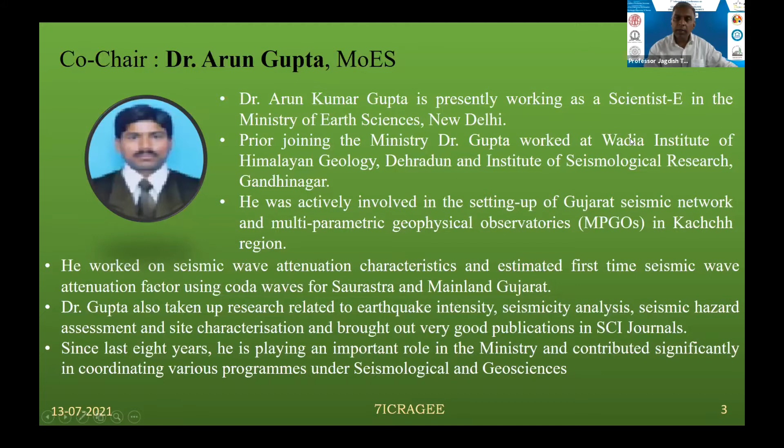Professor Sahu, your mic is muted. Thank you, Professor Ravi Jakka. Without further losing any time, I request my co-chair, Dr. Arun Gupta, to introduce the first speaker, S.K. Nath, Professor S.K. Nath from IIT Kharagpur. We will have another speaker after the first presentation then.

Okay, please go ahead. Thank you, sir. So Professor Nath is a very well-known geophysicist and seismologist of India, and he doesn't need any introduction. So as customary, I will read something, whatever is there.

Professor Nath was born in 1960, and he is a geophysicist, seismologist, and a senior professor at IIT Kharagpur. He is known for his geomorphological studies and is an elected fellow of the Indian National Academy of Engineering, Indian Geophysical Union, National Academy of Sciences India, and West Bengal Academy of Science and Technology.

He has amply been successful in making an excellent blend of exploration and solid earth geophysics and earthquake hazard science and engineering, with ranking contributions in near surface imaging, source, path, site, and ground response characterization, landslide and liquefaction susceptibility zoning, seismic hazard, vulnerability, and risk microzonation, so vitally needed for our globe.

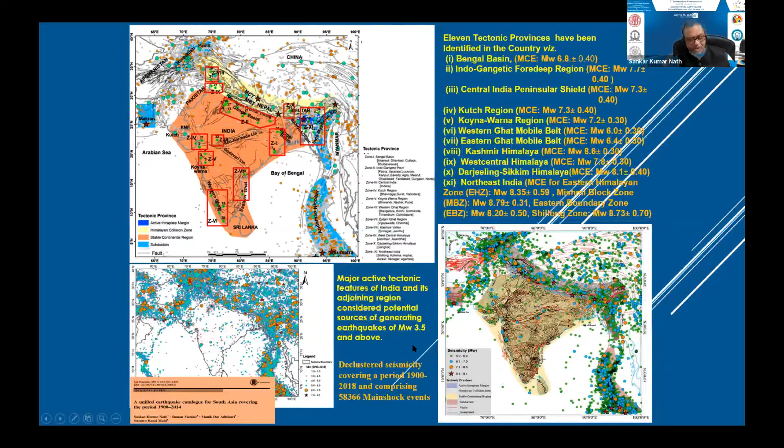So with this situation, we have divided the entire India into 11 tectonic provinces, the seismogenic provinces considered in this study. If you look at this diagram, we have a hugely clustered network of active neotectonic faults and the declustered earthquake catalog of 1900 to 2018, comprising about 58,366 main shock events. For this kind of study, you need the database, seismotectonic model, logic tree framework, and an output.

This needs an earthquake. The seismotectonic model needs an earthquake catalog, tectonic faults and lineaments, the seismicity, and the ground motion prediction equations.

In the seismotectonic model, the first and foremost thing is the layered seismogenic sources. There are many schools of thought which consider the layered seismogenic source as the only source, and a second school of thought which uses tectonic sources as the only source. For our ensemble approach, which is the focus of this presentation, we considered both the layered polygonal seismogenic sources at four seismogenic hypocentral depth levels, and also the tectonic sources.

In seismicity, we used the declustered earthquake catalog I discussed, which gives the recurrence rate, maximum earthquake prognosis, and polygonal and tectonic seismic activity rates, along with a host of ground motion prediction equations, including next generation attenuation models we developed as part of this study, within a logic tree framework where the layered polygonal sources are given 40% weightage and tectonic sources 60% weightage.

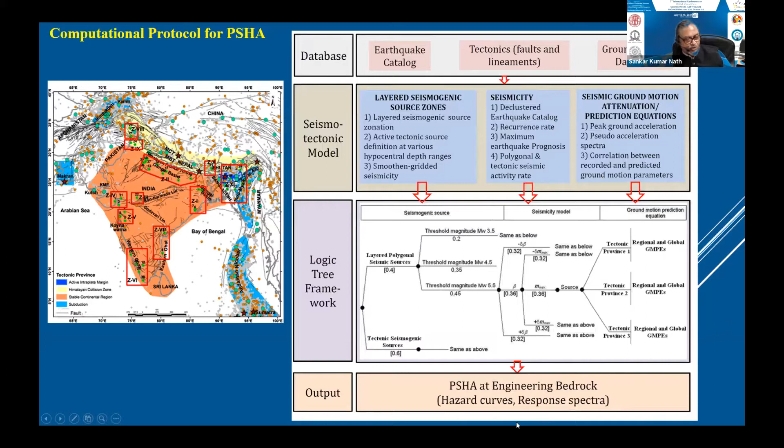Then we have threshold magnitudes of 3.5, 4.5, and 5.5 for this earthquake catalog. Each has a basically complete magnitude, and then we go into the seismicity model with plus minus 0.32 of delta max, across all three. Then come the sources as defined, the tectonic provinces, and the ground motion prediction equations taken into consideration, with the final output being the PSHA at the engineering bedrock.

We divided the entire Indian peninsula into 172 polygonal seismogenic sources at four hypocenter depth ranges: 0 to 25, 25 to 70, 70 to 180, and 180 to 300 kilometers, which are called deep-seated zones. The focal mechanisms were evaluated by summing up all the moment tensors extracted from centroid moment tensor analysis, embedded at these four different seismogenic depth levels.

With this, I'll give a glimpse of the seismicity parameters used, based on a Gutenberg-Richter relationship, modified using a Gutenberg-Richter tapered seismicity model, wherein lambda m is the cumulative number of events with magnitude greater than m, and b value is the slope parameter used in the computation, expressed as an exponential.

I've shown some seismicity analysis. I'm not elaborating on all of them since there isn't enough time, just giving a glimpse of some seismicity analysis and some of the seismogenic provinces.

Zone 12 has an A value of 3.45, B value of 0.72, with M max observed as 7.6 and M max calculated as 8.6. For zone 21, the A value, B value, maximum observed and maximum predicted are shown. Zone 72 plus 73 combined give an A value and B value, required for calculating the activity rate, along with the maximum earthquake observed and predicted, which is 7.2. This is for zone 63, this is for zone 28 plus 30, and this is for zone 25.

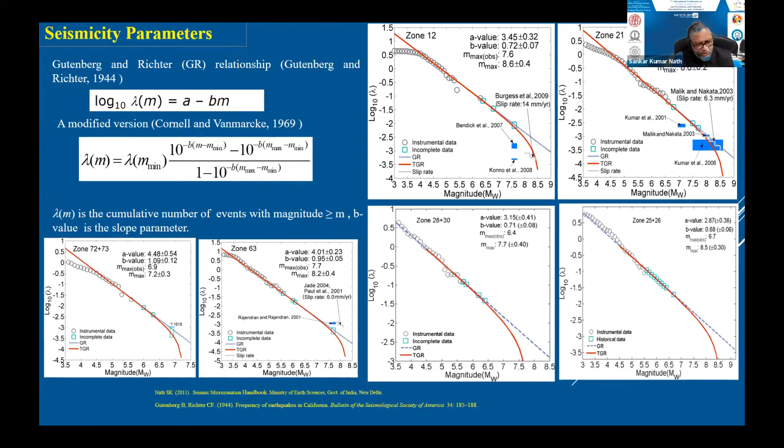This has been done for all 172 polygonal seismogenic sources, with bookkeeping done and stored in the cloud as storage clusters. After this comes the activity rate for each polygonal seismogenic source.

NMR is the activity rate calculated using this equation, where NMR is the number of events with magnitude greater than MR, Dij is the distance between the ith and jth cells, and C denotes the correlation distance. The annual activity rate is computed each time as NMR divided by T, where T is the sub-catalog period taken for each of the seismogenic provinces.

This also gives a proxy about the asperity zones at different depth levels: this is the hypocentral depth level at 25 kilometers and below, this is between 25 and 70, and this is between 70 and 180. If you see here, except in the Northeast Indian region, the seismic activity rate or stress concentration is not that significant.

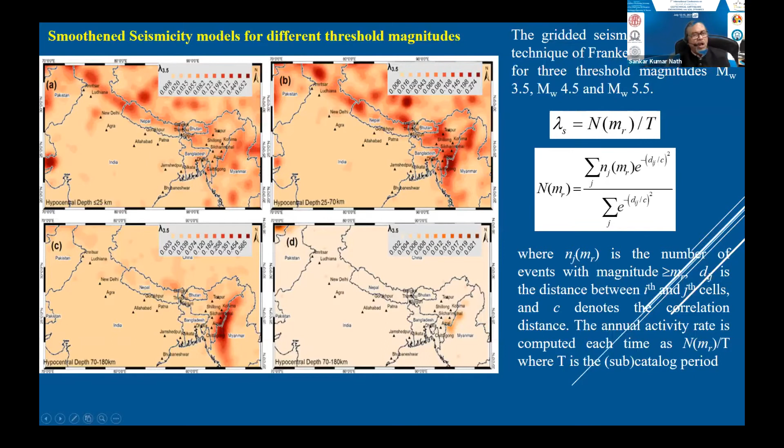The next very important thing is the definition of the bedrock. We used Allen and Wald's relationship along with the topographic gradient map of India to divide the active tectonic and stable continental regions into NEHRP site classes B, C, D, and E, where B is greater than 760 meters per second, C ranges from 360 to 760, D varies between 180 to 360, and E is less than 180 meters per second.

So the boundary between B and C is the engineering bedrock that has been considered. If we plot this for India, we can see that most of the Indian peninsula pertains to the site class between B and C. Therefore, we have considered BC as the engineering bedrock to which the probabilistic seismic hazard of the whole Indian peninsula pertains.

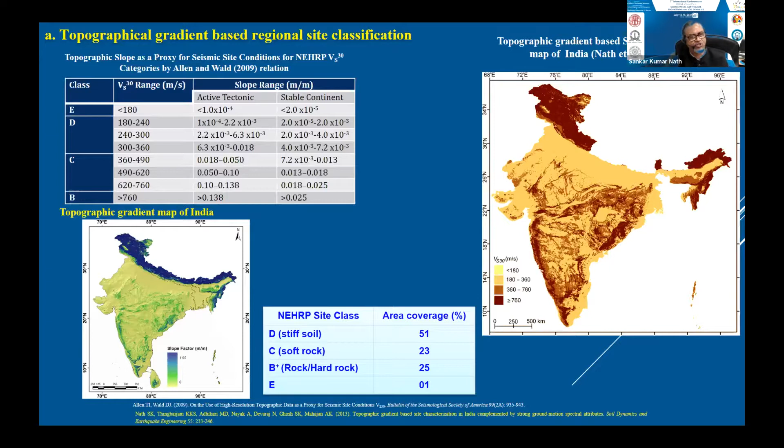Then comes the ground motion prediction equations. We used two next generation attenuation models: Boore and Atkinson as the classical model, and Campbell and Bozorgnia as the second. Using these for all the ensembles, we developed about 120 ground motion prediction equations. These are spectral ground motion prediction equations for each and every time period.

Apart from this, we also took the ground motion prediction equations published by Sharma et al., Parvez et al., and others, along with regional as well as global ground motion prediction equations, depending on whether it is for the active or the passive belt. So with this, we selected the ground motion prediction equations.

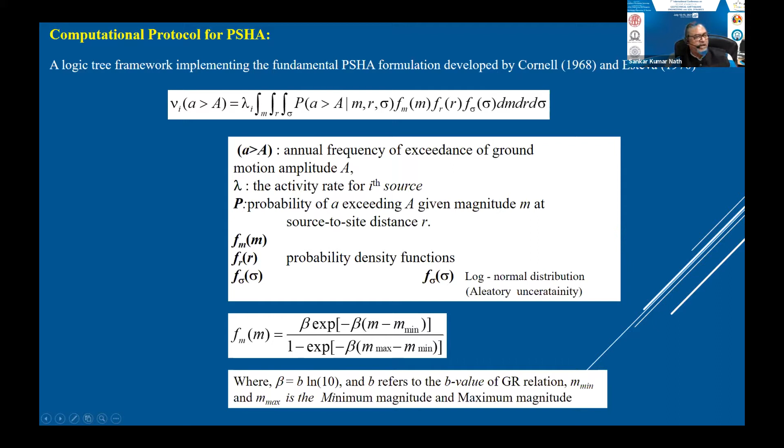With this protocol, we calculated the probabilistic seismic hazard probability curves for 10%, 20%, and 2% probability of exceedance. We can also have a 20% probability of exceedance and even 1% probability of exceedance. Here, we have taken only the 10% probability of exceedance with a return period of 475 years.

If we see the seismic hazard map of India with this protocol, using only probabilistic seismic hazard with polygonal seismogenic sources without taking tectonic sources at all, it gives a PGA variation with maximum estimated PGA of 1.392 associated with Northwestern Himalaya and Northeast India.

The cities of Srinagar, Jammu, Kangra, Shimla, Dehradun, Chamoli, Lucknow, Muzaffarnagar, Darjeeling, and Gangtok exhibit relatively higher hazard levels. The same is the case in the Northeast India region, at the state capitals of Itanagar, Tezpur, Guwahati, Kohima, Imphal, Aizawl, Manipur, and Nagaland, being exposed to very high hazard levels.

The cities of Bhuj, Kacchh, Rajkot, and Pune exhibit very high hazard levels. The cities of Delhi, Udaipur, Patna, Jabalpur, and Latur are seen to experience moderate hazard to the tune of 0.44 to 0.60 G.

After that, since we already have a site class from the topographic gradient method, using the IBC nomenclature, we get the site response of the order of about 1.5 to 2.5, varying at all the site classes, and by convolving that with the probabilistic seismic hazard at the bedrock level of BC, 760 meters per second,

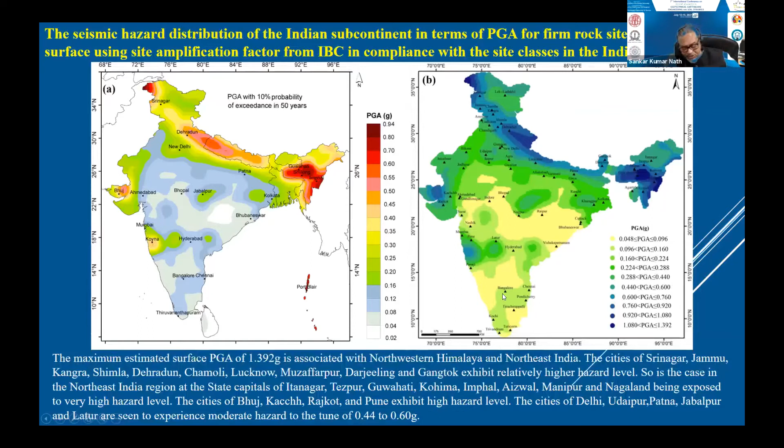So with this, what we do is try to calculate the seismic risk assessment at the regional level, with 1:1 million scale, at the Indian subcontinent, where we have considered the risk elements: building rural wall, building density, building rural roof, land use and land cover, building urban wall, building urban roof, population density, and spatial distribution of PGA with a 10% probability of exceedance in 50 years on IBC. The regional seismic risk map is prepared by integrating all of them through a fuzzy integration model as shown here.

This is the seismic risk map of India, which shows that the entire Himalayan territory is severely at risk, and so is the Kutch region, the Koyna and Western Ghat mobile belt. There is some risk at the southern Indian Peninsula Shield and the Eastern Ghat, while central India has relatively low to moderate risk. This is because of urbanization and also because of socio-economic considerations, so even if the hazard level is high, the risk level is low in central India.

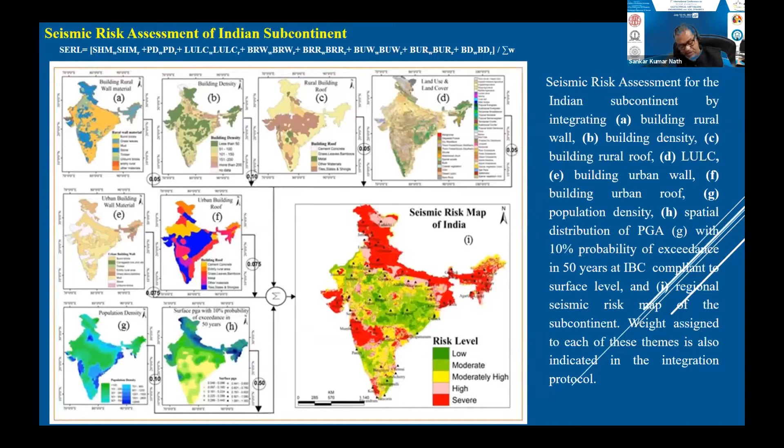Now I go into the ensembles, which is our domain, starting from West Central Himalaya all the way up to Northeast India, taking into consideration the Indo-Gangetic Fore-Deep, the Bengal Basin, the Darjeeling Sikkim Himalaya, and the Northeast India region including Bhutan. So what we did is take the active tectonic provinces, along with the polygonal seismogenic sources.

All the active tectonic provinces will have the activity rate of lambda f equal to 0.5 alpha s plus sigma s n into m0, where alpha s is equal to ls by summation of ls, and sigma s is equal to ns by nz, where ls is the fault length, ns is the number of earthquakes associated, and nz is the total number of earthquakes in the polygonal sources.

This shows the seismic activity rate at different hypocentral depth levels, and the activity rate distribution at different hypocentral depth ranges, below 25 to 70 km. As you can see, 25 to 70 is the range with huge asperity and stress concentration where all the tectonic fragments converge, than at 70 to 180 or even more.

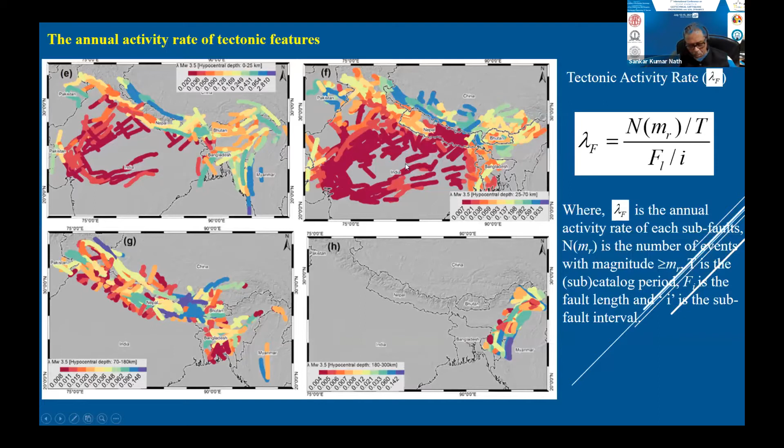Then we have framed the logic tree framework for all five tectonic blocks: A is for the West Central Himalaya, B is for the Indo-Gangetic Fore-Deep region, C is for the Bengal Basin tectonic region, D is for Darjeeling Sikkim Himalaya and E is for Northeast India. I have already explained the logic tree framework where we consider both the layered and the tectonic provinces, and then we have the threshold magnitude.

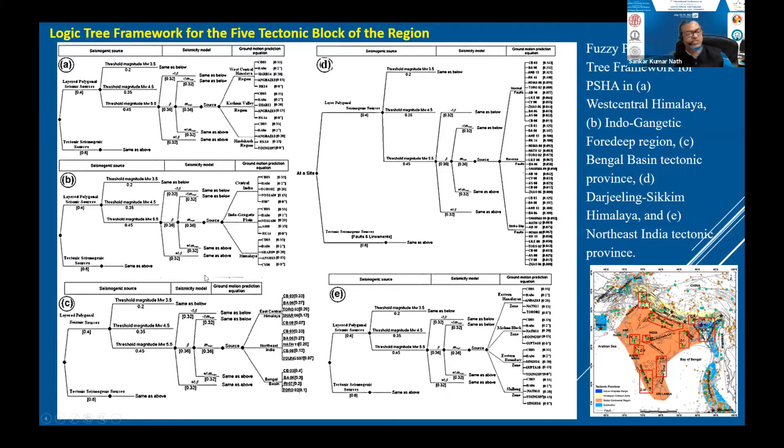Now we come to, so we have got the hazard at the bedrock level. Now I will put it to the surface through probabilistic site classification. So what do we do in the regional site classification? Allen and Wald have considered only topography, but we have considered here geology, geomorphology, landform, and topography all together.

So we have basically VS30 coming from geotechnical and geophysical data, and from earth science attributes like geology, geomorphology, slope, and landform, we get the GGMP, we get the regional seismic velocity coming from here.

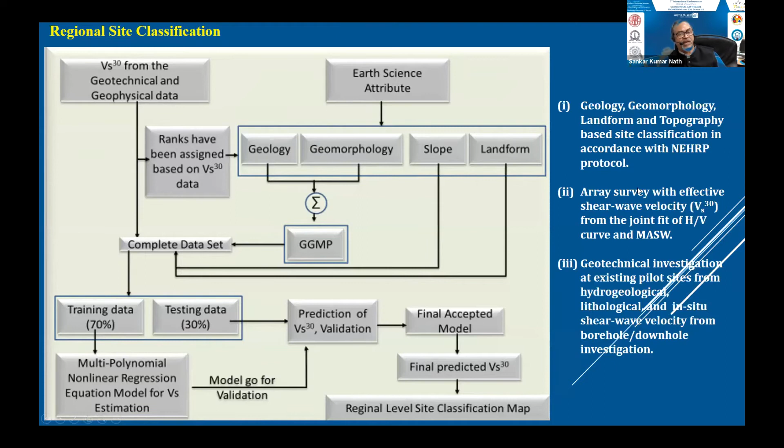So what we consider: the entire territory was divided into training and testing sets. For training we have considered multi-polynomial regression, considering geology, geomorphology, slope, and landform, and we have come up with a fifth order. I'm sorry, I just skipped this.

So these are basically the protocols for site classification. We have three protocols: one is the NEHRP, one is the UBC, and the other, the latest one, is the Sun classification. NEHRP has got A, B, C, D, E, and F, and UBC also has similar classes. But Sun et al. has divided C into four: C1, C2, C3, and C4 site classes, and D has also been subdivided into D1 to D4.

E has remained as less than or equal to 180, and if E is being liquefied, then it becomes F.

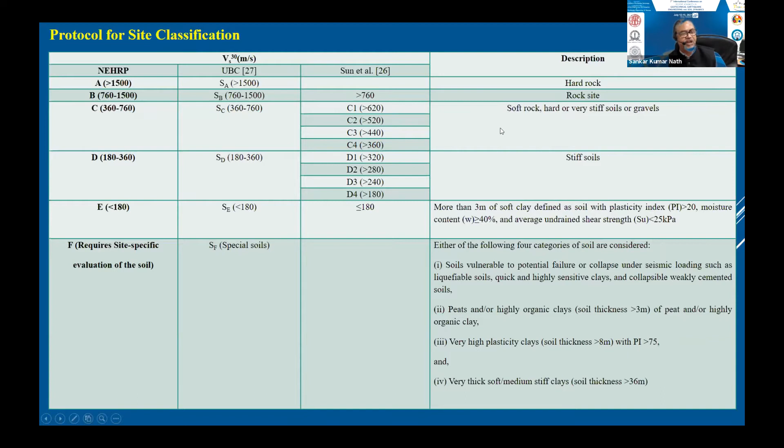So this is the definition of all of them, and I am skipping these definitions. What we did is we took Northeast India as a benchmark case study for regional site classification using the geology, geomorphology, topography, and landform.

This shows the surface geology, B shows the geomorphology, C is the integration of geology and geomorphology, which is the GGMP map, and then we have the slope angle coming in D, and E is the landform. We have evolved a fifth order polynomial considering all five

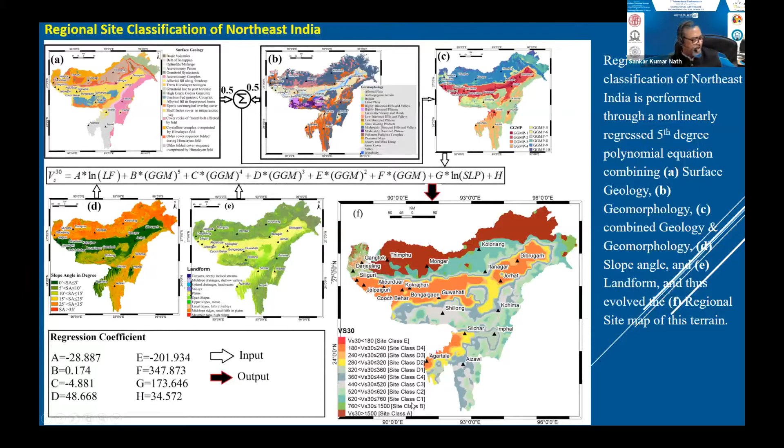earth science attributes here. By doing this, we have got a regional level site classification of Northeast India, which has given us 11 site classes, and even very fine site classification has also been obtained.

Once we correlated this with our regional and the geotechnical, which is the in situ, we have seen that they are within plus minus 1 standard deviation. But if it is compared with geotechnical with the topography, it is underestimated.

If we have gone for the regional residual plot between the geotechnical and the regional, this is almost coming to the center line. But the topography and the geotechnical has become negative, so it shows that it has been underestimated.

These are our in situ data points where we have done the HVSR survey location, about 15,000 ambient noise surveys. We have more than 2,000 borehole locations. We have about 1,500 MASW and SASW data and joint HVSR, MASW, SASW, and in situ geotechnical locations, about 2,000.

So this shows some of the glimpses of some of the geotechnical data at borehole in Chandigarh. This is a borehole in Amritsar. This is in Agra, and this is in Noida.

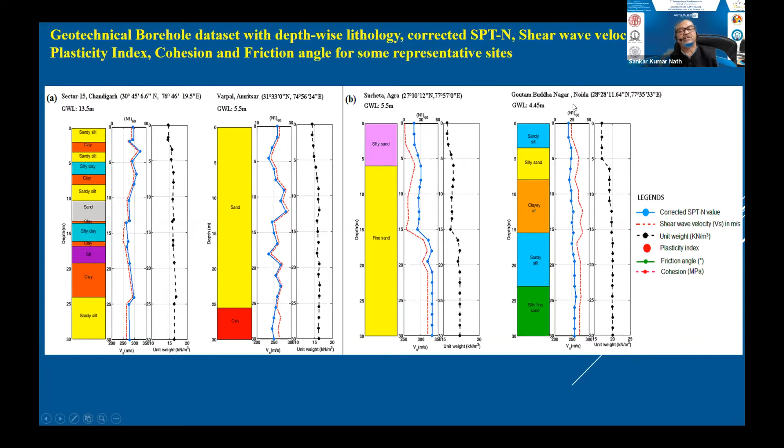So then we went into the surface geophysical investigation by using SASW and MASW techniques. I've shown you the field setup here, where we can go for SASW and MASW single, or we can have a joint fit of HVSR and MASW, or MASW single, which will give you a 2D cross section of the shear wave velocity distribution.

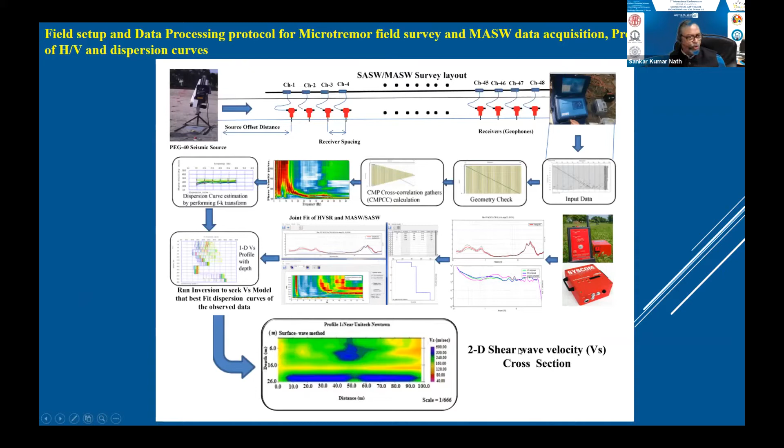So this is the framework that shows the type of investigation that has been carried out by several agencies, and also some which we have done ourselves.

So these are some glimpses of the ambient noise survey. This is the raw data, and this is the H by V. When we have inverted H by V, we have got the 1D velocity structure. This is in Newtown, Kolkata.

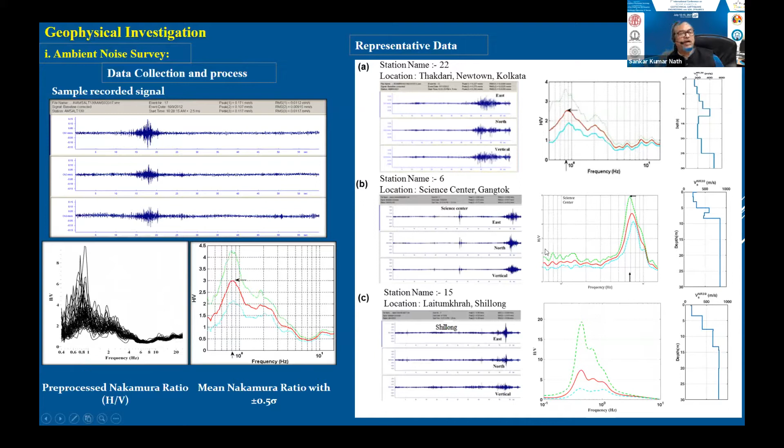This is an HVSR, and this is the joint inversion of MASW and SASW, wherein we get the 1D velocity structure by combining HVSR as well as the dispersion curve. This is again a joint fit in Medinipur in West Bengal, and this is in Roorkee.

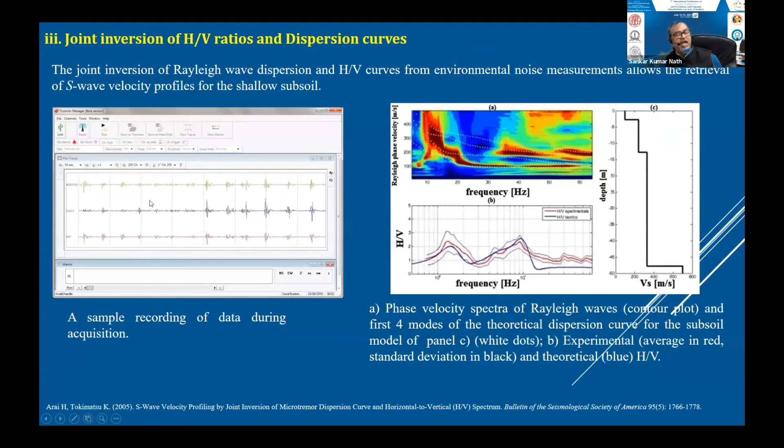Apart from this, we have considered the in situ shear wave velocity from downhole seismic survey, as well as the geotechnical NSPT, the SPT values corrected, and we have developed the exponential relationship between Vs and the corrected SPT N values for different lithology, depth-wise.

These are 4 average lithologies: sand, clay, silt, and all soils for a combination of Agartala, Chennai, Delhi, Bangalore, for these average site classes.

So with this, from SPT N values we can get shear velocity, or vice versa, from shear velocity we can convert to SPT N values for liquefaction.

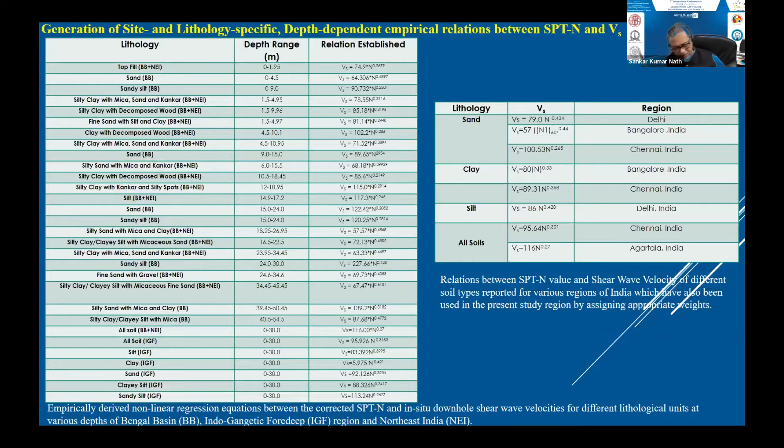So therefore, with this, we have got the site classification map of the tectonic ensemble of 5 tectonic blocks taken together, and we have 11 site classes, starting with site class E to site class A. This is site class A here, and otherwise we have all the other site classes here.

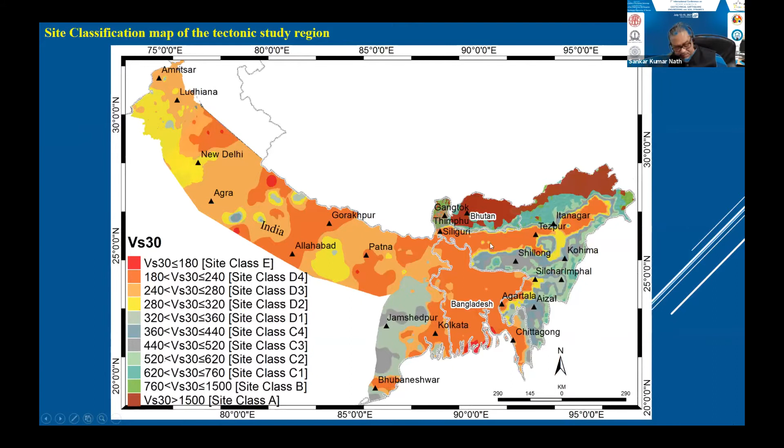And then we have to go for ground motion prediction equations, because we have to generate the ground motion prediction equations.

So we have got raw data from PESMOS, from our own strong motion station, and from other stations like IIT Guwahati and all. Apart from this, we have to also synthesize by using stochastic simulation.

By using stochastic simulation, we have simulated many earthquakes, and these are some sample simulations: the 1905 Kangra earthquake, the 1934 Bihar Nepal earthquake at Patna and Mansa, the 1930 Dhubri earthquake located in Sylhet, Bangladesh, the 1918 Srimangal earthquake at Rajshahi, Bangladesh, the 1897 Shillong earthquake at Gotanagar, Guwahati and Tashigang, Bhutan, and the 2009 Bhutan earthquake.

This is a cartoon that shows where the earthquake has originated, and the earthquake takes a path and has to come to the engineering bedrock, and through this engineering bedrock it has to come to the soil layer. This soil layer is what we have got from the drill hole investigations, and also the model created by using both geophysical and geotechnical investigation together.

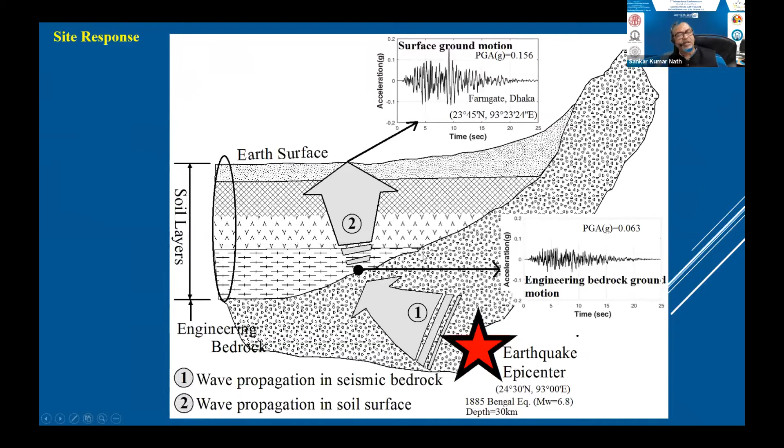Then we use DEEPSOIL analysis for doing site response study. So we initialize, select the linear or equivalent linear approach. Geotechnical and geophysical field investigation has been carried out.

So we have the shear velocity layers, and then we have the recorded and synthesized ground motion, and then we have the soil parameters. These are the models, and we have used EXSIM. We have got the bedrock properties here. Finally, we've got the acceleration time series and the acceleration in the frequency domain.

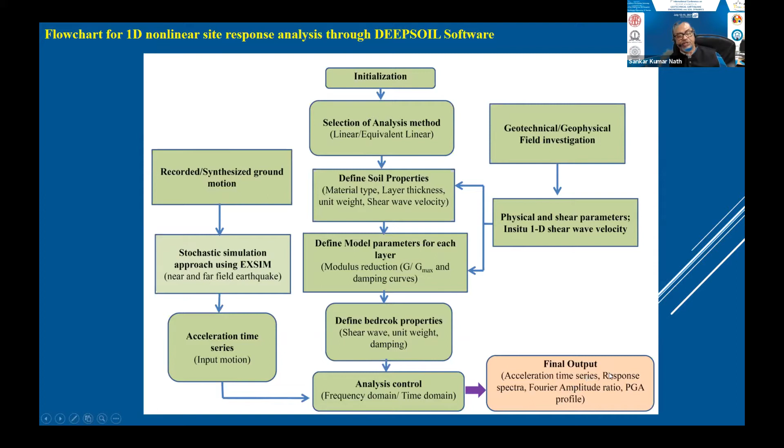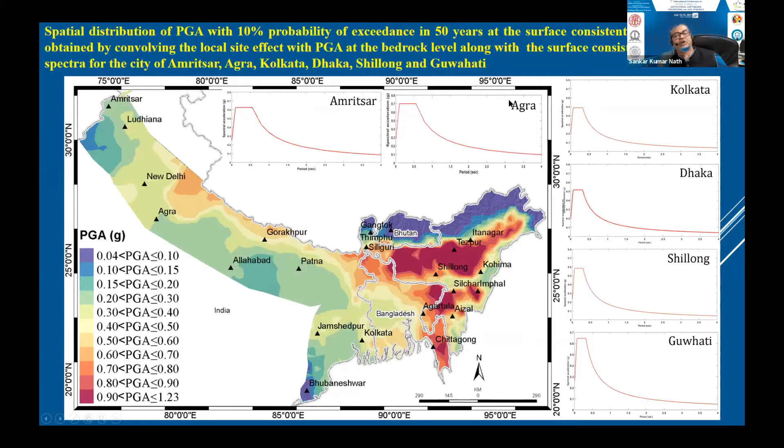This is the surface PGA distribution, because we have convolved the PGA at the bedrock with the site response, and with this we have got the PGA distribution at the surface, which will vary between 0.04 to 1.23. These are the design response spectra at the surface at Amritsar, Agra, Kolkata, Dhaka, Shillong, and Guwahati.

And then we go into this, so we have now got the surface seismic hazard.

Now we move into induced seismic hazard coming from secondary phenomena, which is liquefaction, occurring exactly in the northeast, the alluvial regions of Guwahati, Kolkata, Bangladesh, and the Indo-Gangetic foredeep region. These are all alluvial field terrains where we do liquefaction assessment from CRR and CSR through geotechnical investigation.

So we have both the earthquake data and the geotechnical data. We calculate the cyclic resistance ratio and the cyclic stress ratio, and then we calculate the factor of safety (FOS) as a ratio between the two. From FOS we calculate the liquefaction probability distribution, and liquefaction risk is calculated from liquefaction potential, liquefaction probability density, and the thickness of the layers. LPI is the liquefaction potential index, and these are other related parameters.

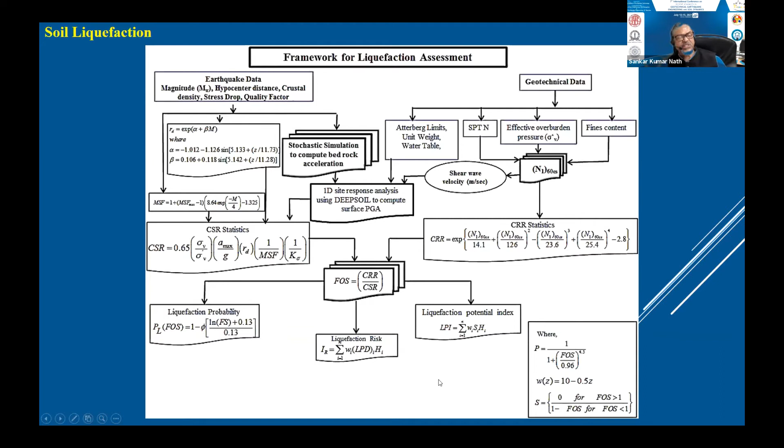With this, we have done the synthesis of the liquefaction LPI distribution from all the historical earthquakes: the 1905 Kangra earthquake for the northwestern Himalaya, the 1803 Garhwal earthquake, the 1934 Bihar Nepal earthquake in this zone, the 1885 Bengal earthquake in the Bengal Basin, and the 1897 Shillong earthquake, and 1950.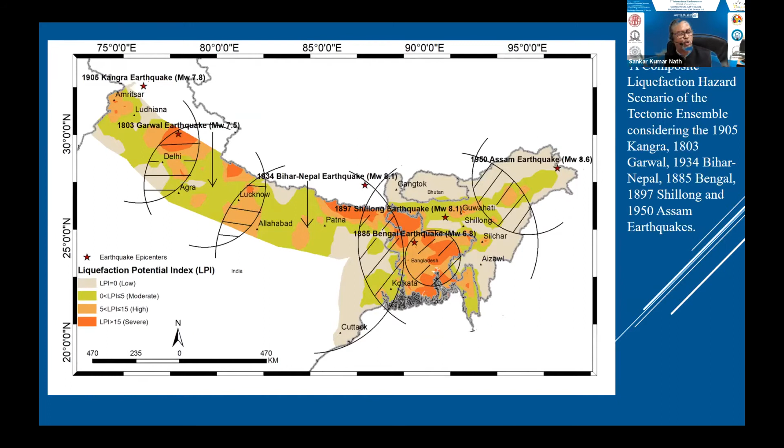This shows a collage of the liquefaction scenario for the entire tectonic ensemble, and this shows the liquefaction LPI distribution in the cities, categorized as low, moderate, high, and severe. This is in the city of Amritsar, this is in Kolkata, this is in Shillong, and this is in Dhaka.

So these are the same cities when we go into bringing in the deterministic liquefaction potential at the surface, using the surface-consistent probabilistic seismic hazard. This shows a severe liquefaction potential distribution here for Amritsar, Kolkata,

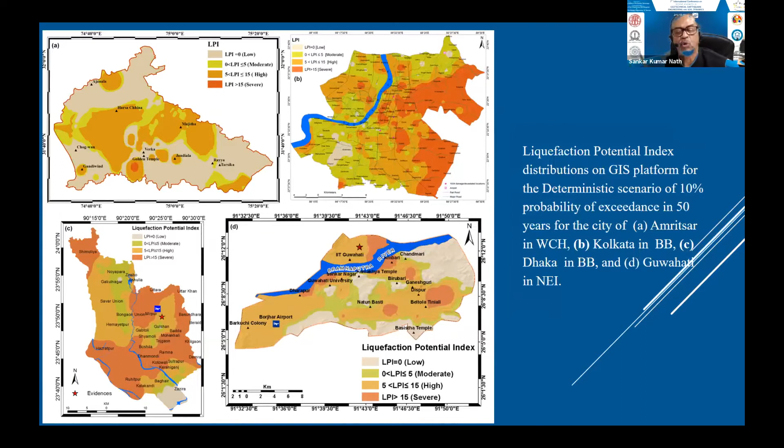Dhaka, and Guwahati. With this, then we go into the topography, the rugged terrain in Darjeeling, Sikkim, the Himalaya, and Bhutan, and move into landslide distribution using spatial and non-spatial data - geological, geomorphological, and environmental. We do data integration using hierarchical methods or machine learning and artificial intelligence, statistical analytical validation of the LSI through ROC and R-index, and landslide hazard zonation.

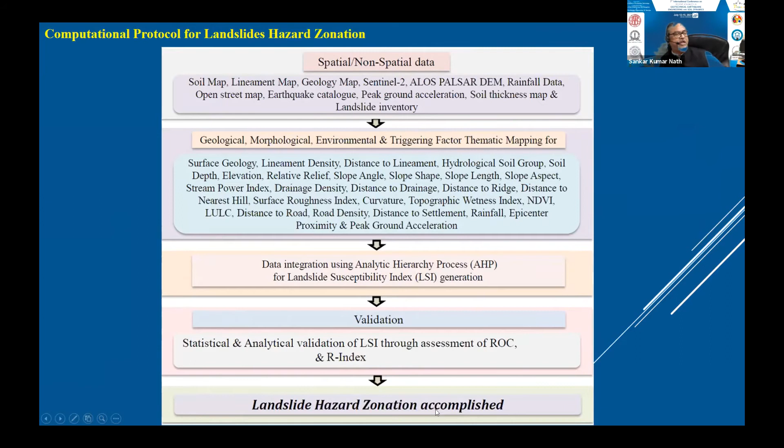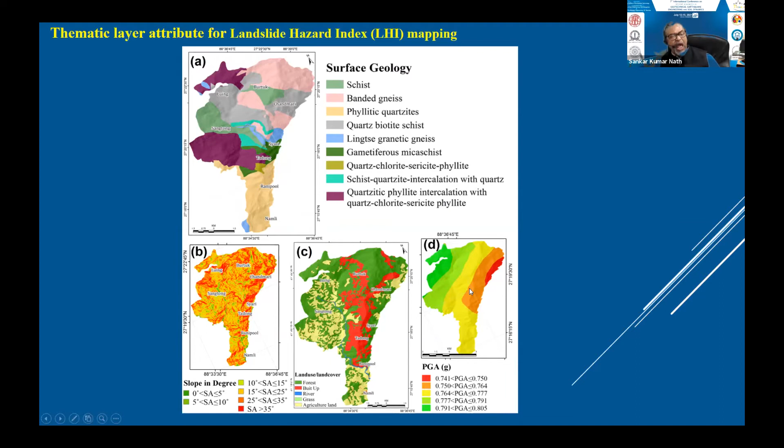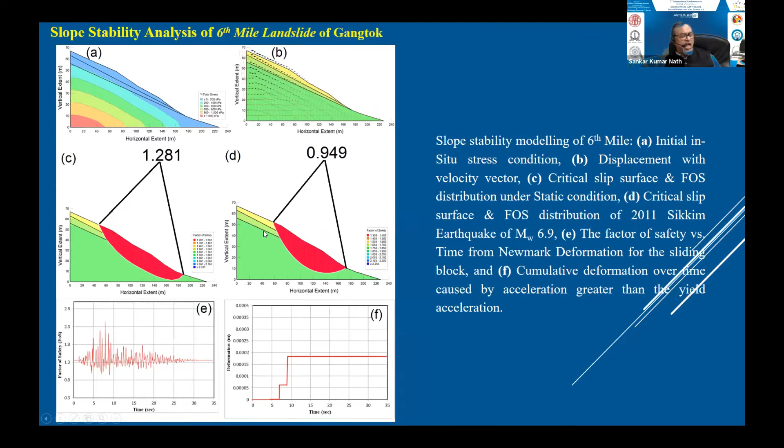With this, we did the slope stability analysis using the GeoSlope software, QUAKE/W and SLOPE/W. We got the FOS distribution here, and this shows the unit circle and the extent of the circle from where the earthquake-triggered landslide originates. The static model has shown a factor of safety of 1.28, but the dynamic model has shown 0.949.

So with this, I now go into the implication of seismic hazard. I hope I still have a little bit of time—5 minutes, yes. I am now on the last slide.

So for the last part, for the implication of this, I have considered Selena, a GIS-based software, which needs a probabilistic seismic hazard at bedrock level through DEEPSOIL and the ground. We have the surface level seismic hazard, then the vulnerability and fragility curves, and the capacity spectrum method, wherein we calculate the building damage in terms of none, slight, moderate, extensive, and complete.

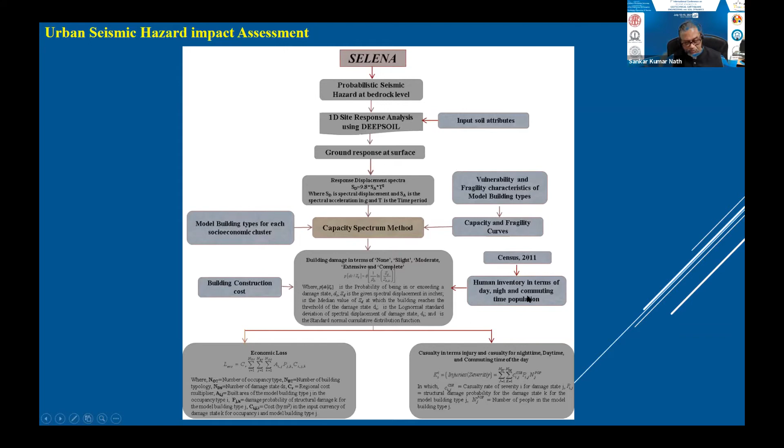Building construction cost we get from the urban ministry, and the human inventory we get from the 2011 census as of today, and then we calculate the economic loss and the failure. We have actually identified 12 building typologies here, including the heritage building.

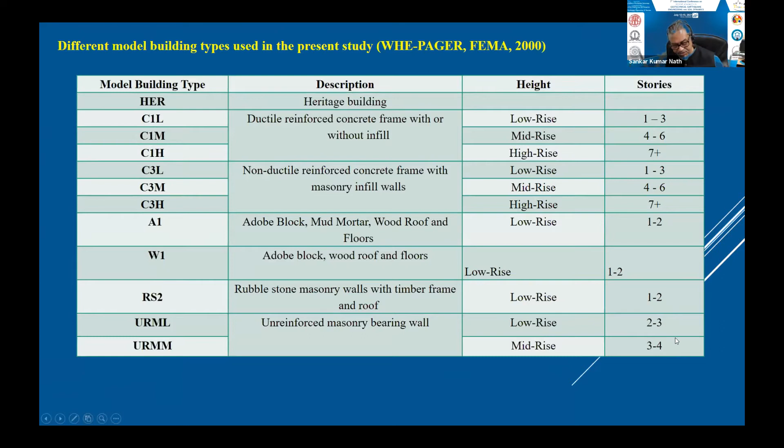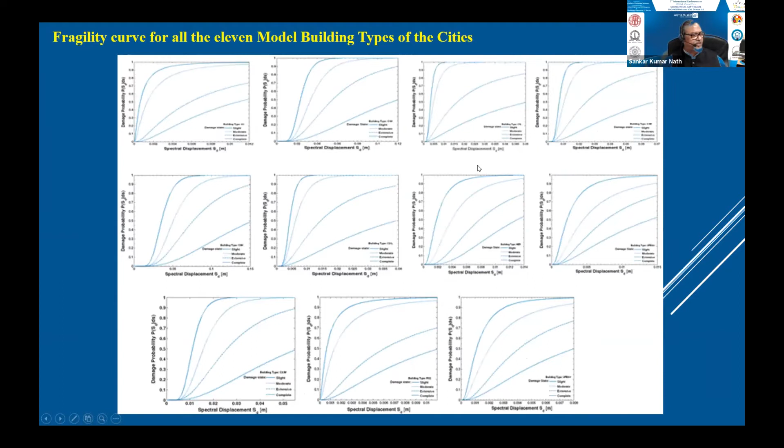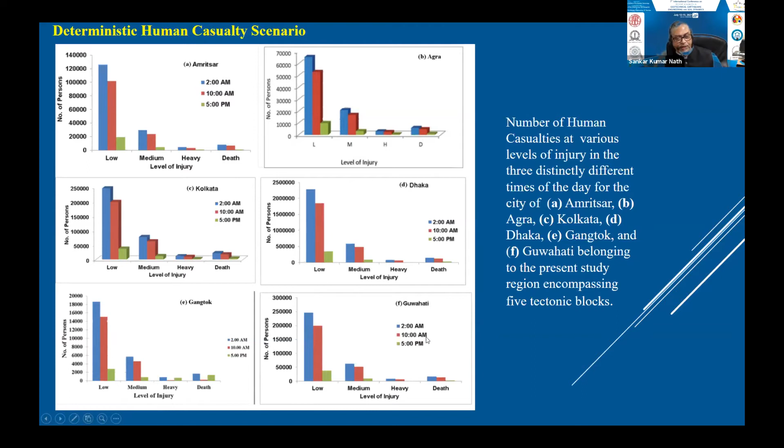If we go into the human casualty ratio, in Amritsar at 2 a.m. in the dead of night, the seismic casualty will be extremely high. At 10 a.m. it will be this, and at 5 p.m. it will be low. And here, this is in Agra, Kolkata, Dhaka, and this is Gangtok and Guwahati. So with this, we can see exactly the implication of the hazard.

So I have given you, basically, the total journey. We have taken a journey through the seismic hazard and risk of the Indian peninsula as a whole. Then we have taken the ensemble of the 5 tectonic blocks that spans from the northeast and northwest Himalaya all the way into the northeastern India region.

India is considered one of the most hazard-prone countries in the globe, and all these 5 tectonic ensembles have also been considered based on their type of hazard distribution. So to conclude from this discussion, seismic hazard analysis has emerged as an important issue in high-risk urban centers across the globe, and is considered an integral part of the earthquake-induced disaster mitigation process.

In practice, site conditions significantly influence the seismic hazard potential of a region, and therefore its characterization is of utmost importance in the quantification of site-specific surface-consistent seismic hazard of any earthquake-prone province anywhere in the globe. The present study appraises the site characteristics vis-a-vis the site-specific seismic hazard potential of the ensemble of 5 tectonic provinces.

West Central Himalaya to Northeast India, including Bhutan, Indo-Gangetic Foredeep region, Bengal Basin, Darjeeling, Sikkim Himalaya, based on an enriched surface geological, geomorphological, topography, landform, and in situ downhole geotechnical, geophysical database of the region, with a new regional 5th-order nonlinear power law polynomial combining shear wave velocity with geology, geomorphology, landform, and topographic gradient as a set of new lithology-based depth-dependent SPT values derived from in situ downhole seismic measurement yielded shear wave velocity.

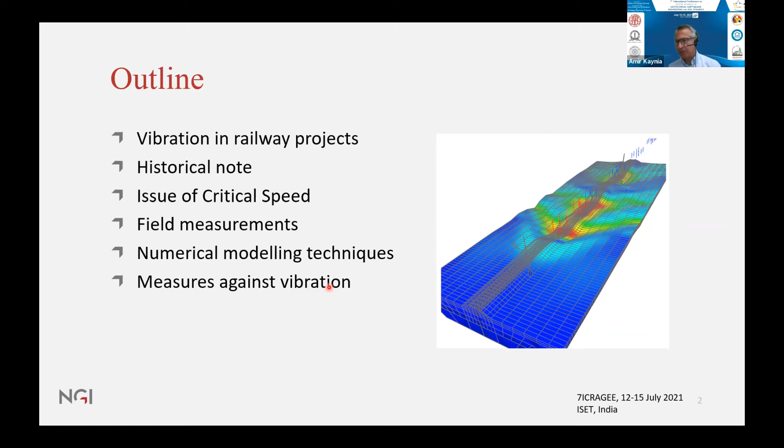This is the title of my talk: high-speed trains with different tracks on layered ground, and measures to increase critical speed. This is a summary of the topics I will cover: vibrations generally in railway projects, a historical note, what critical speed is, field measurements, some numerical modeling techniques, and how to use techniques to reduce vibrations on these tracks.

Basically, the challenge is that railways now face high-speed lines coming closer to congested urban areas. You could have soft ground, areas with strict vibration requirements, and high axle loads, which actually make the situation worse. So vibration is becoming more and more a serious problem in urban areas.

Vibration generally increases due to rail and track and ground irregularity and wheel damage, what we call wheel flat. For the same conditions, vibration increases as the soil gets softer, meaning softer in terms of stiffness, shear wave velocity, and shear modulus. Vibration also increases with train speed. All these are intuitive factors.

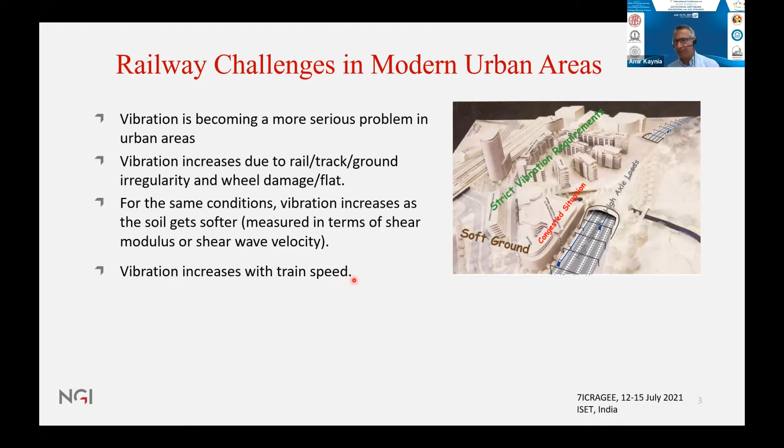In many cases, for example in Scandinavia, very much north of Europe, we have soil so soft that even ordinary high speed, like 200 to 250 kilometers per hour, reaches what we call Rayleigh wave velocity in the ground, leading to a condition we call critical speed. Loosely speaking, it's a well-known way of saying it among engineers, for which track and ground vibration dramatically increase. I have a video I will show you shortly, you will see how it works. In many countries, high speed easily reaches 400 kilometers per hour, but in countries with soft soil conditions, even 200 to 250 could be problematic.

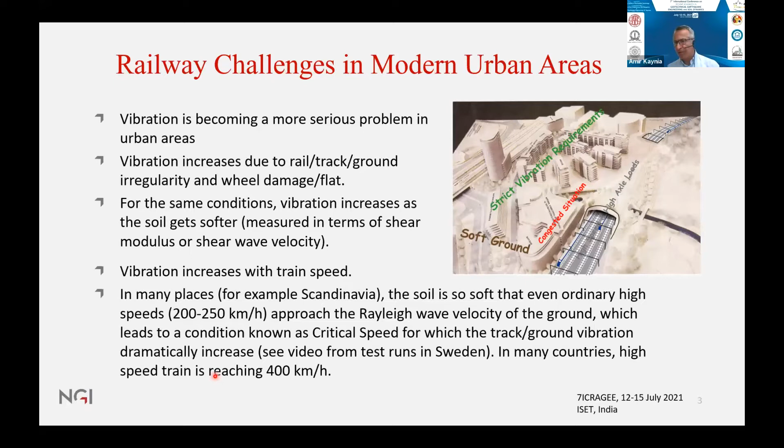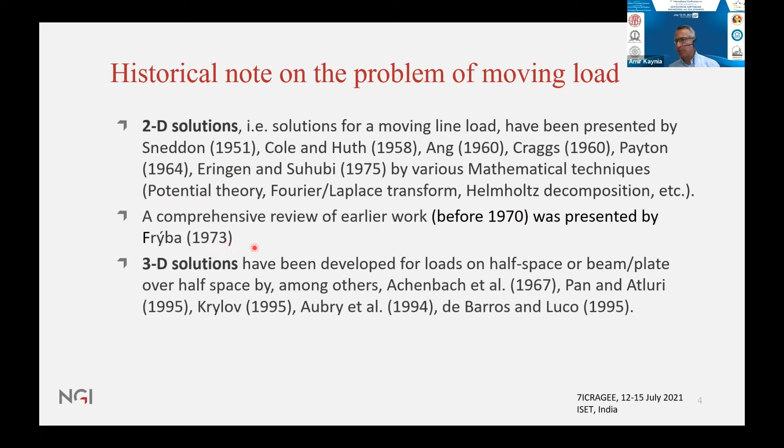I have in the written version of this talk, in the proceedings, in the book, some historical notes on the problem of moving load. There are 2D solutions, and I have a list of the history of 2D solutions from many authors with many different techniques and theories: potential theory, Fourier-Laplace theory, Helmholtz decomposition, and so on. Most of the theoretical development was done before the 1970s, and a good work by Professor Frýba in 1973 nicely sums them up. Then there are 3D solutions, which are more naturally important. I won't go through these in detail, they evolved over the years and are mostly theoretical, until I move to numerical solutions next.

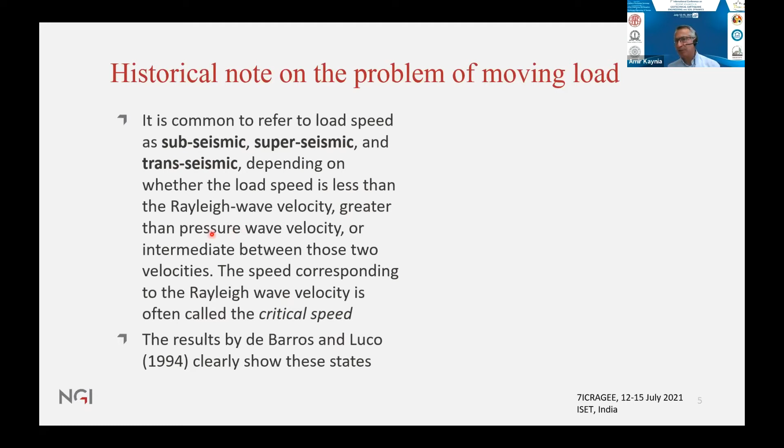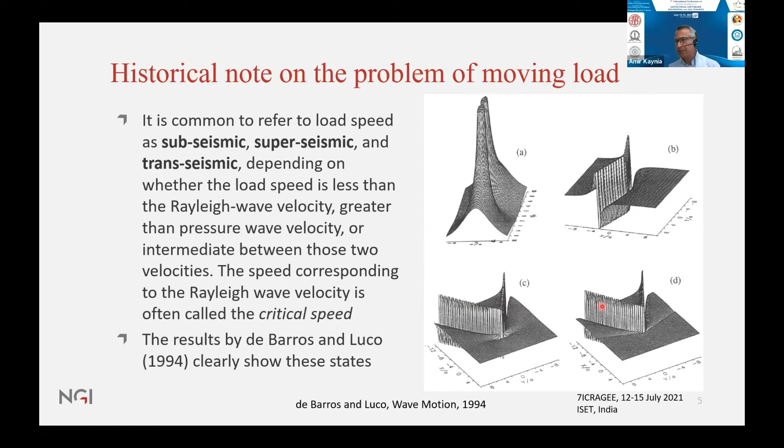While these theoretical solutions were being developed, it was not until 1998 that evidence of this critical speed and large displacement was observed in test runs at a test site in Sweden, thanks to the work of the Swedish Rail Administration, courtesy of them. At this site they observed a lot of response as they increased the train speed, which previously had not been a problem. When they did a good site characterization, they found an organic peat layer with very low shear wave velocity, about 2.5 meters deep, shear wave velocity on the order of 30 to 40 meters per second. This was a good combination, and they corroborated and characterized the site well.

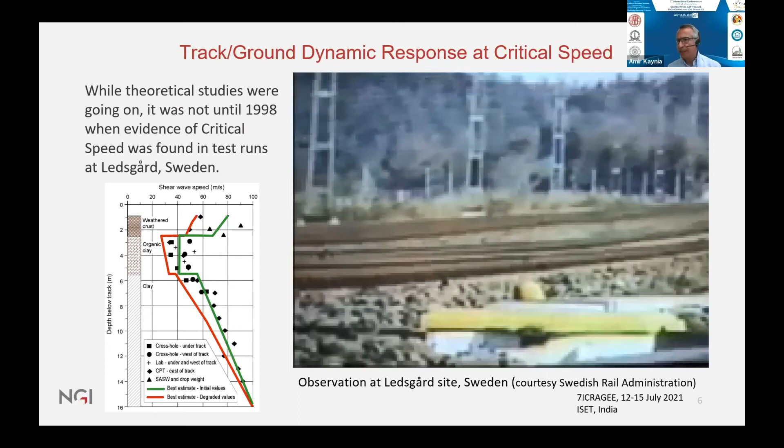I'll show this: the train is going at about 140 kilometers per hour, and the camera is heavily moving. This footage was digitized after 1998, so the quality is not as good. I have a more recent one as well, from about 3 to 4 years back. When the train passes, watch closely here, because nothing happens until the train arrives.

It is slow motion, and you will see waves generated depending on the speed of your receiver. You will see waves generated on the ground. So let's try that.

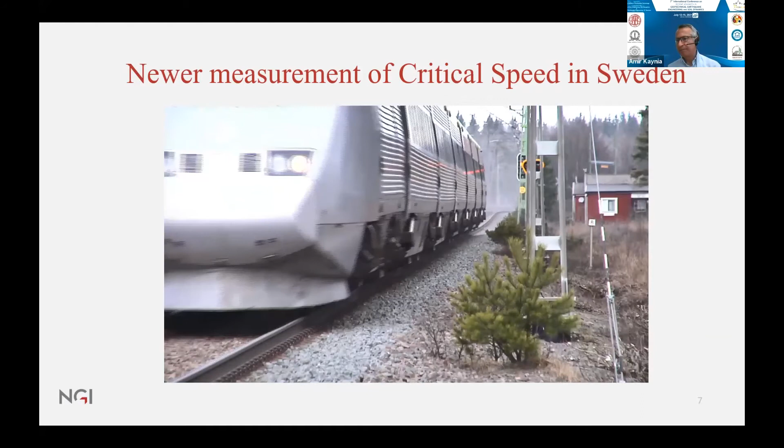I tried again here, look at here. So basically, this is an animation of the same case. As you see, the train is moving this direction, and these plow lines are created as the train moves, and that creates vibration.

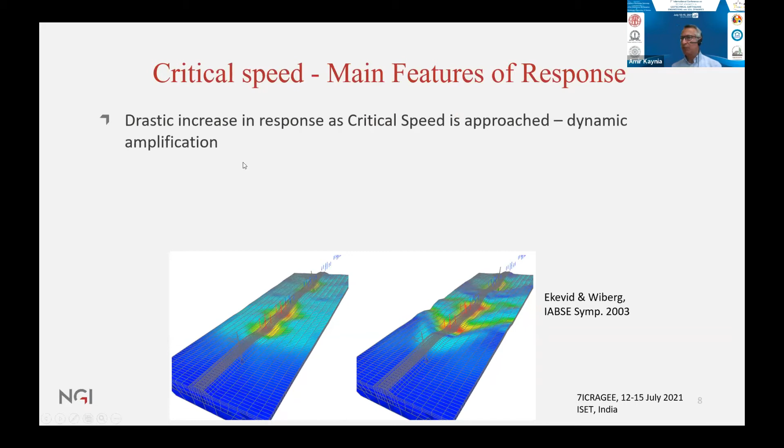What is the critical speed? Main features of the response is that we see a drastic increase in response as critical speed is approached. There is a dynamic amplification, which reduces above critical speed, so that's why it is called critical.

Dynamic motions upward and downward happen. At low speed, there is no upward motion, it's only downward. But when you reach this speed, you start to get even the track vibrating up and down. Plow-shaped wave fronts, called Mach fronts, appear on the ground surface as this is moved.

There are, as I said, theoretical solutions summarized, but more recently, because people want to have all the features of the train track, layering, even non-homogeneity, heterogeneity, everything, mostly the solutions have been around finite element solution, combination of finite element, boundary element, Green's function solutions. Some people use what we call 2.5D finite element, which means just a slice of this element and then using Fourier transform in the other direction to make it faster.

So these are examples from the literature with the references underneath them. This is a full finite element with good boundary conditions, if I'm not wrong it is Abaqus. And these are cases where you get the response by superposing the response from individual loads.

And this is the model, the 3D model in COMSOL we tried at NGI through this paper that shows the complete model. It has a PML limit so that we do not need to have a very large model. This is the section, and this is the section. So a lot has been done recently.

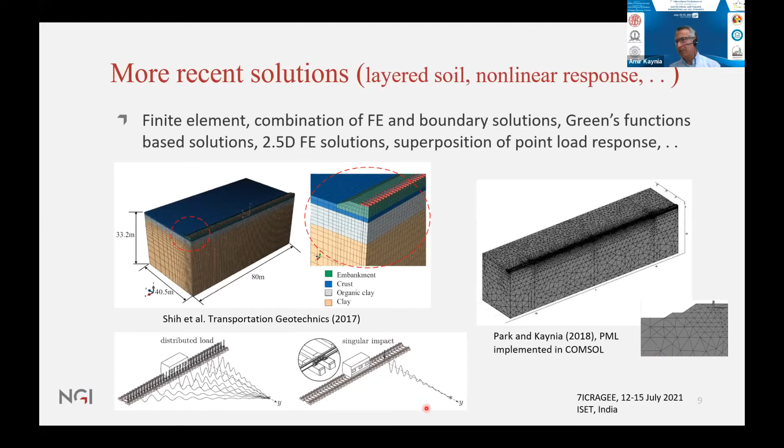And we have another model for filtering, for screening and for capturing the mechanism of wave propagation in general, based on a track modeled as a beam on a layered ground. And it is through a kind of decomposition method that the load interaction between the track and ground is expressed.

If this is called P, then the response of the ground is expressed through what we call Green's function, which is the displacement at all these points as a result of these loads coming. And then the track model, the track itself, by a finite element, is straightforward. Once you put them together, you get the complete response of the system.

So this F is related to the stiffness of the ground and the stiffness of the beam, and this is solved in the time domain. When we say Green's function, it's the solution at all these points due to a unit load. There are usually analytical solutions for them that are solved numerically by time integration.

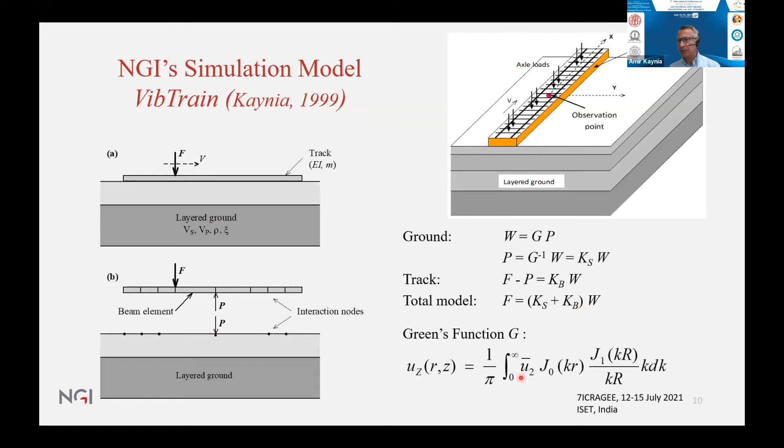So we used that one when we were involved in this research project, and this shows some of the simulations and some of the measurements. What you see here is that the red is the measured values. This is at one point in time, consider that you freeze time and take a photo of the displacement pattern.

So this is the train location, these are the axle loads, and you will see that the displacement is as expected - it's like the footprint of the loads. So everything is positive downward, or negative downward, and the simulation in blue is pretty much nicely matching it. Everything is, of course, downward.

But as the train speed increases to 185, you will see the pattern completely changes. It's not that wherever the load is, the displacement is maximum. At that moment of time, the displacement along the track is pretty complicated - it's upward, downward, it has a vibration pattern in it. We did not have the result for critical speed because they could not do the test, so these two are only results of simulation.

So if we plot all this data on a graph with train speed on the horizontal axis, as the train speed is low, let's say even up to 100 kilometers per hour, this is the curve for upward displacement of the track, and this is for the downward. Basically, there is practically zero upward - it's all vertically moving downward, up to 4 millimeters in this case.

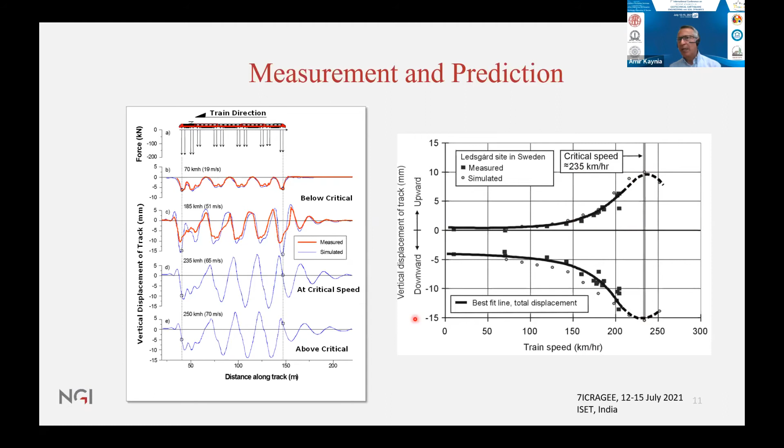And just to be sure this COMSOL model is doing a good job, this is the model from the top. The load is moving along this direction. You will see these are the colors of the displacement, and these are the Mach lines generated as the load is moving. And this is like a 3D pattern.

As you can see, displacements penetrate into the ground in the same fashion, and also as the load is moving on the two sides. This part is like the PML, so the model is actually pretty small. It's only this part, and everything around it is the absorbing PML, so-called.

PML model. Now, having said all this background, what do we do? How do we deal with it, now that we could have a vibration problem? How do we deal with it?

So there are different ways. One is at the source, under the source - somehow we should fix it here. The other solution is that we stop it on the propagation path. And then the other thing is at the receiving point, either in the building by making it stiffer, or in the foundation, for example, making it stiffer, putting piles - again, whatever solutions.

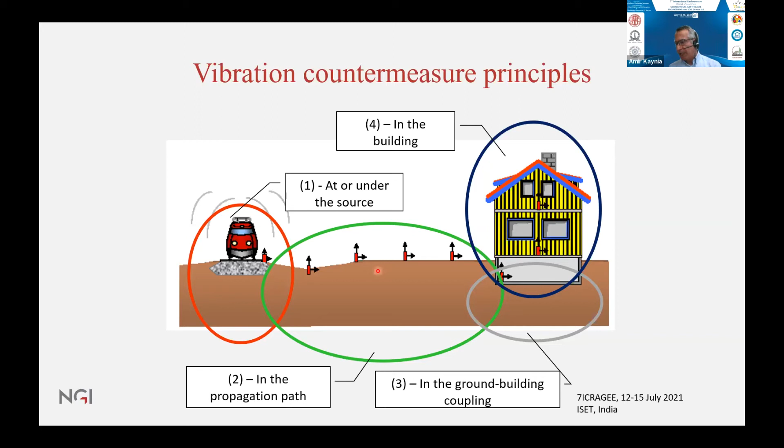So there are different ways of dealing with these vibrations, and they depend on the type of vibration. Basically, there are two regimes when it comes to ground vibration from trains. One is usually at high frequency - over 20 hertz, 25 hertz, pretty high frequency. They are usually created due to rail or wheel unevenness, corrugation, defected wheel, or cracks, flats.

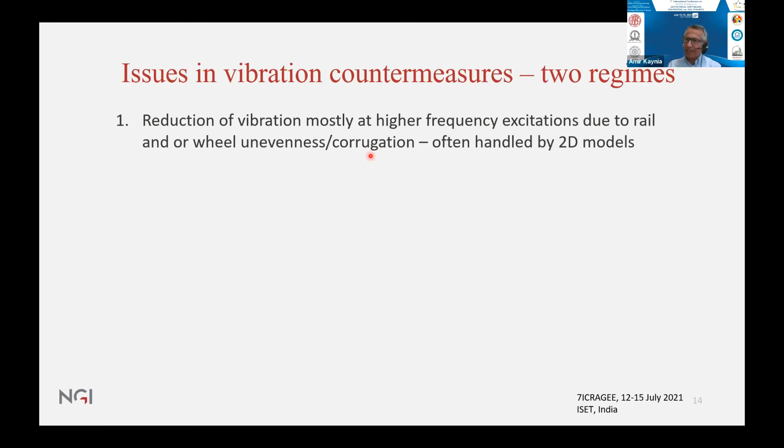So these are usually handled often by 2D models. This is a 2D model. The load is perpendicular to the plane. And this is, if there is a given frequency - I'm just showing it qualitatively, one case - it shows the ground vibration at, I forgot exactly what frequency, 20 hertz or something, what pattern we have.

And then this is after putting some countermeasures, like in form of trenches or stiffened ground. And you will see what it does in this case is that it returns the vibration, basically reflects it back. And this area, which is mostly for residential and other purposes, is protected. So this is one type of countermeasure, which works usually for higher frequency.

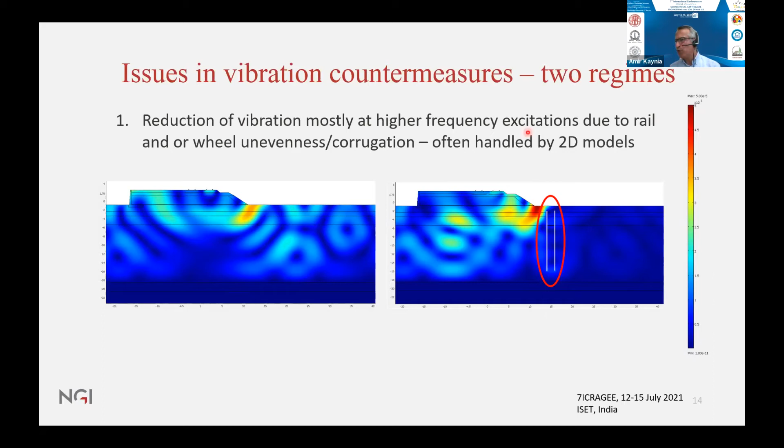But when we come to the critical speed issue, which is a problem created basically at the source, putting such things doesn't help because this is lower frequency and these measures are usually very ineffective. So one has to do something with the track, otherwise the track will be in trouble.

So there are ways to deal with them, and this is happening in many places. The most recent of them, you see the project HS2 in UK. In some areas it has to deal with it, for example.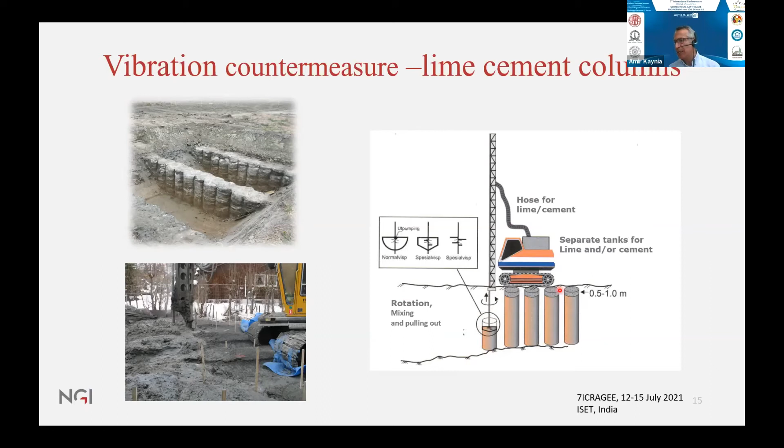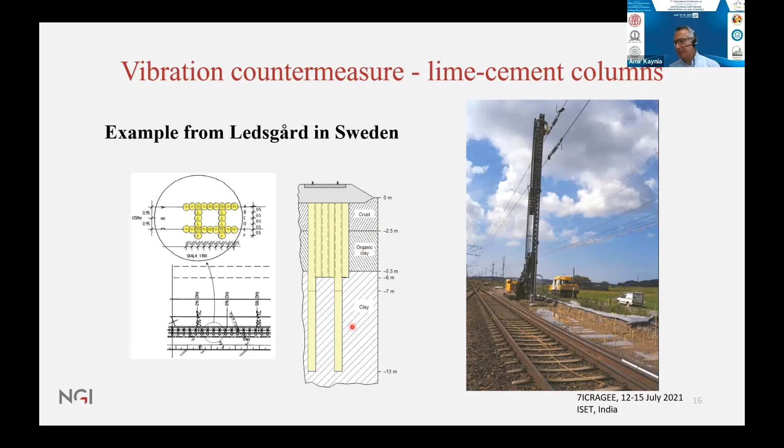So this was tried at this site that I showed the video to you that had this problem. It was performed there. It was 2 lines, so 1 line was removed, only 1 line was used, and during that time this technique was applied, as you could see how it looks, and it was penetrated through that peat layer, and some of these columns were driven further down, and it turned out to be very effective.

The red is like the displacement as the train was passing. You could see a large displacement, over 1 centimeter. And this is before and after this countermeasure - it was dramatically reduced to almost nothing. So it was pretty much effective.

And we did a simulation of it in COMSOL as well. I'm not going to show you that, but I'll show other types of results.

Now, the question is back to the same thing, the issue of critical speed - how to increase it. Because the only way to avoid the problem is not like having a trench next to the track or something - you need to do something at the track. And the solution is basically to do something so that this critical speed is increased, so that we are not getting into this area, basically pushing this to the right. And how to do it?

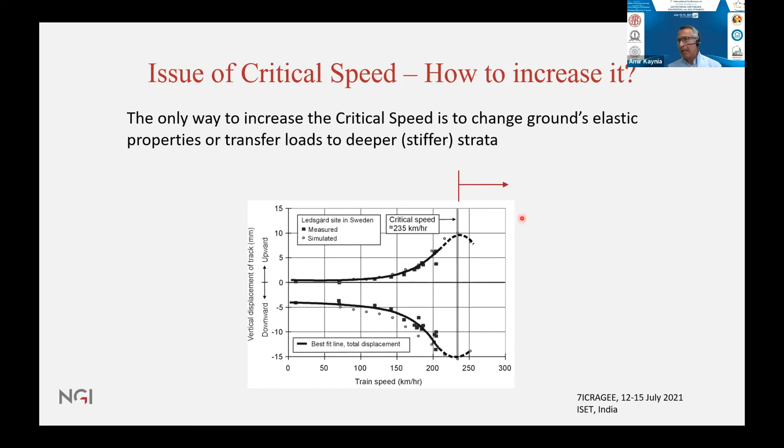In my paper, I have investigated 3 methods, 3 cases I have considered. The first case is stiffening the ground.

Okay, this is this one - it's the opposite order, the first one is the second one. Let's say stiffening the track and embankment, like putting a stiffening embankment, or even putting a very stiff beam underneath the track ballast and all that, making it stiffer, which intuitively makes sense. And as the train goes, it just distributes the load better.

The second one is stiffening of the ground. So rather than simply replace a part of the ground by some improved material, by some better material like crushed stone, or injection and grouting - there are many techniques, soil improvement basically - or use of piles. So basically put the track, whatever it is, a beam or whatever, on a series of piles. It could be one pile, it could be several piles, but anyway in the area, because this problem is not necessarily everywhere, it's certain stretches, and then it could be done this way.

Pile driving is simple, so this could be done rather easily, and it's very reliable, because then you are sending all the loads to a deeper layer rather than being worried about gradual settlement effect on it. So each of them have advantages.

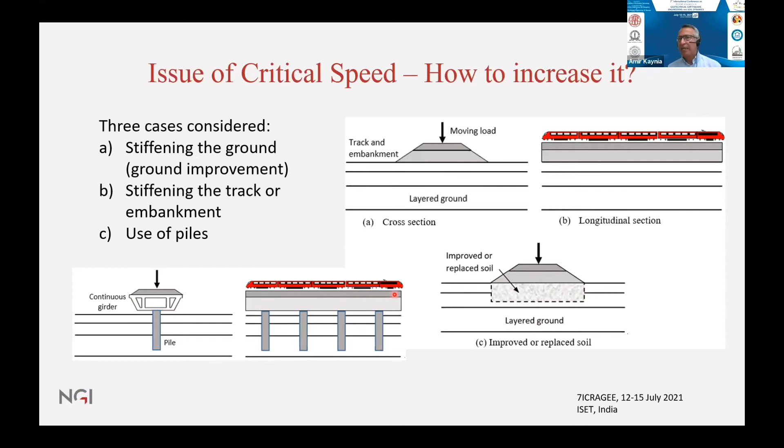Now, to measure the performance of these methods, I first look at my base case, which is no measure, which is the case I showed through the video. And it is the site with this organic layer, soft soil. These are the train loads, exactly as was used in the test runs. And these set of figures are displacements. And these are the corresponding - they are the same information: ground velocity on the track, particle velocity, and this is displacement.

You just need to think about this one - these are different speeds, this is time. So as the train passes, we look at a given point as the train passes. So when the load comes, this pattern of displacement is observed at a given point as a function of time. So this is at low speed, as we expect. But as the speed increases, the pattern starts to change, and then completely changes, goes to this super-seismic and trans-seismic and others, like track moving upward and the vibration.

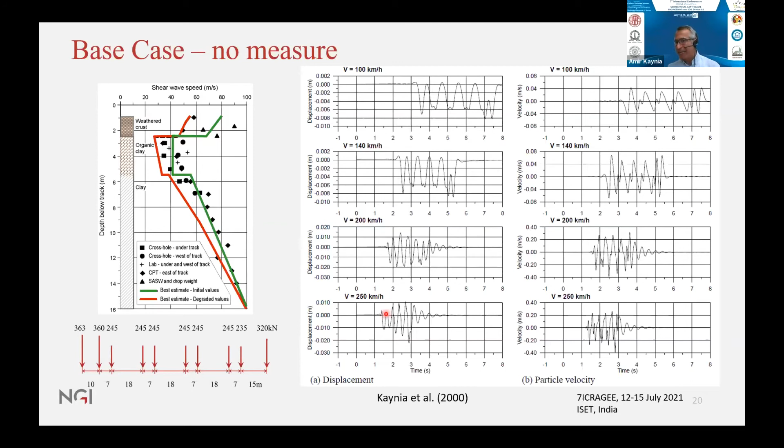And numbers are dramatically larger. This is like below 1 centimeter, this is already over 2 centimeters. So this is what I call the base case, as the case was there, because we have numbers for it, we have data for it.

So the first case is stiffening of the ground - this is ground improvement. What I did is replace it; this is a very effective method and could be reasonably done. It could be done different ways - as I said, it could be injection, grouting, or it could be replacing of the material. So in this case, I replaced it - the peat layer was completely replaced. That's the problematic layer, natural.

So this was what was done, and this is like the base case, I just copied it here for reference, with the same velocities. Now with the new track - let's say the track is the same, it's just the ground is changed - you will see, please note it's not the same scale, by the way. If I use the same scale these figures would be very small, so this is much smaller. For the same speed, displacement is considerably smaller - look, this one is 0.003 and this one is 7-8 times. So definitely it is a very effective technique.

Of course, in each case, as you increase the speed, displacement and vibration, acceleration, all increase with speed. But if we use that as a measure, it is an effective technique. And of course, one could go ahead and optimize. If you have a good tool, like the tool I showed, VibTrain, you could easily optimize it - how much, because we don't want to make it too stiff. Too stiff has its own problems, actually - it has problems for higher frequencies. So it's a balance, how much we want to make it stiff.

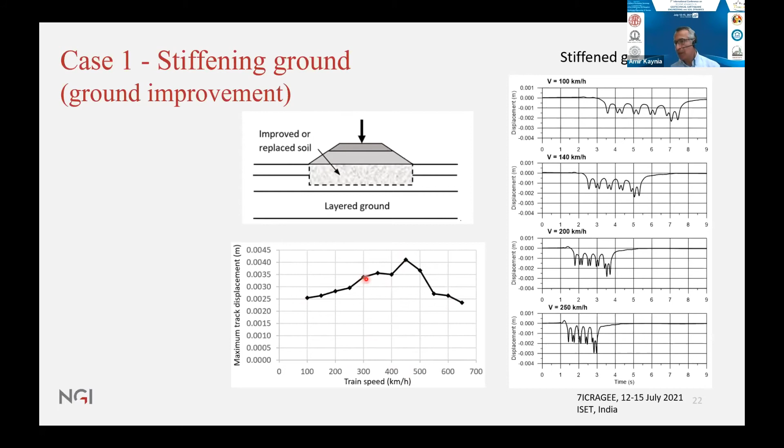This is what could be loosely said as the critical speed of the new system. And of course, if the design speed is like about 40% lower than that, in this range, it's a success. It's a good solution. We're way away from it. So this is that one.

But then the other solution was track stiffening, because people could say, well, this is easier. We just simply make a stiffer embankment on the ground. We don't need to touch the ground, or maybe even put a girder beam, a stiff beam, underneath the ballast and make it stiffer. In other words, the track is stiffer.

So again, I'm showing only two speeds, for example using a stiff beam. I'm showing just two cases. One is the base case, same as before, at the two speeds, and stiffened track. When I say stiffened track, I mean the results for stiffened track are when the stiffness of the embankment or the beam together, versus the base case, is quadrupled, 4 times. So we see an improvement.

It's the same scale in this case, so we see an improvement. However, when I see this upward movement, there is a good improvement, but when I see this thing, it gives me a bad feeling that maybe I have not fixed the critical issue. So it has helped, not dramatically. Stiffer track reduces the displacement and vibration, fine, but it does not noticeably change the critical speed, which I'm going to tell you shortly, because I see this feature of the upward movement. Displacement reduced is not necessarily enough.

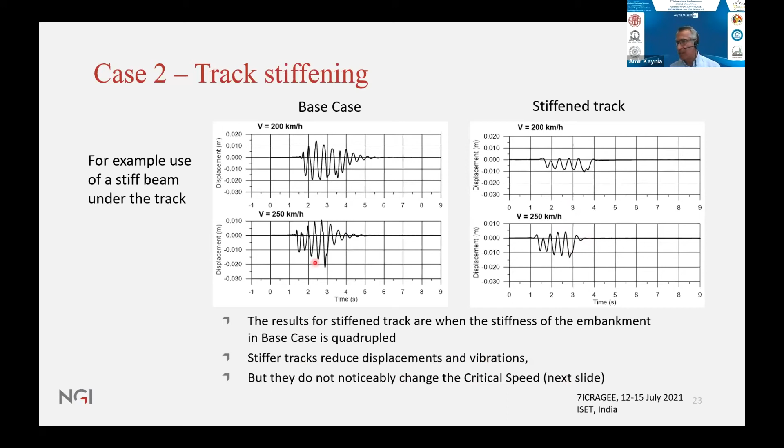And we should realize that this is not good, because if this is in an urban area, the houses around start to feel this. So even if the level of displacement of the track is okay, this is not at all a pleasant solution.

Finally, the solution of piled track. If I put the same track on a beam, and the beams are on piles - in this case I chose just arbitrarily, just to get a feeling, 2-meter diameter concrete piles, 9 meters long, so that they penetrate through that soft layer and a little bit into the good layer, installed at every 12 meters. It's arbitrary, just to get a picture.

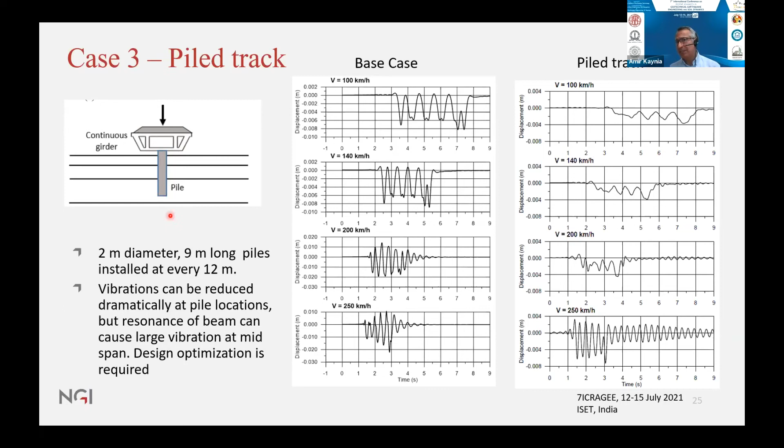So a design optimization is required - maybe a stiffer beam, maybe closer piles, for example smaller piles but closer, that sort of thing. But at least it is a very effective solution. It has the extra advantage that you pass the load to a deeper area that has less settlement. So it is, in a way, a good longer term solution.

And that brings me to the summary, that there are basically two response regimes when considering reduction of ground vibration from high-speed trains.

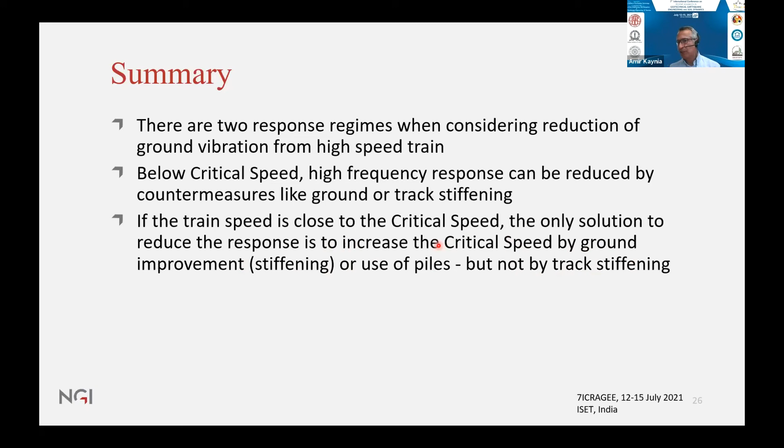If the train speed is close to the critical speed, the only solution then, it's not like trenches or other things, is that we should reduce the response. To reduce it, we increase the critical speed itself by ground improvement like stiffening it or use of piles, but not by track stiffening, not just putting a stiff beam on the track on the ground. So it has to be something inside the ground to change the characteristics of the propagation medium.

Track stiffening will reduce the track vibrations, but the vibrations away from the track, like trackside, are not noticeably affected. This is important for design of tracks on soft soil through urban areas, because now residential areas or sensitive facilities come very close to the track. So even if you reduce a little bit of the track vibration, the vibration is still there to the surrounding.